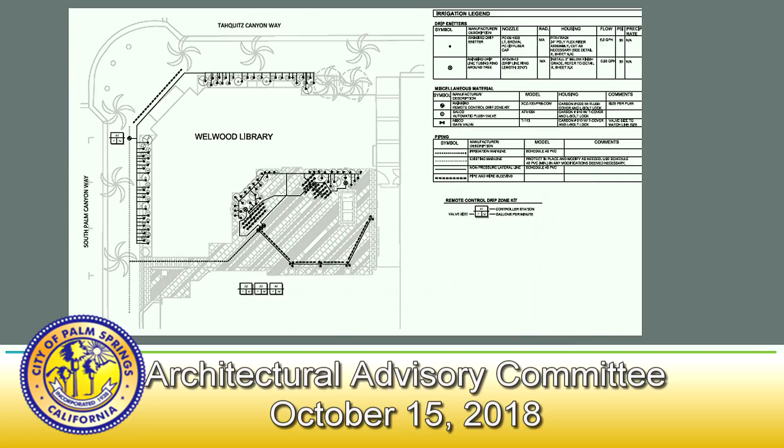The historic assessment that is outlined in the Kalon report attached to your staff report identifies that we do have some information about how the courtyard was arranged when it was first constructed. The courtyard as it exists today has essentially lost all of its historic integrity and features that were there at the time of its original construction.

Not only that, but in terms of its actual context and surroundings, the report and the photos indicated it as being sort of an open and sunny patio. It's now fairly landlocked by taller buildings and is in shade most of the year. There are some historic photos in the Kalon report that you'll also see. So the goals of this review, as noted on page 5, are to seek from the AAC recommendations on what portions of the Kalon report might be appropriate to bring into the design, and what aspects of the current Volz design might be reasonable and appropriate to remain.

The primary issues or differences, if you will, between the library board and the HSPB is one of design aesthetic. There are certain functional issues that the two groups are concerned about, but the primary driver, if you want to say the contrast or difference between the two, is that the library board is seeking a design that is fairly contemporary in nature in its style and patterning, and the HSPB believes that more of a traditional or historic design to the landscape in that courtyard would be more in keeping and be more harmonious with the architecture of the building.

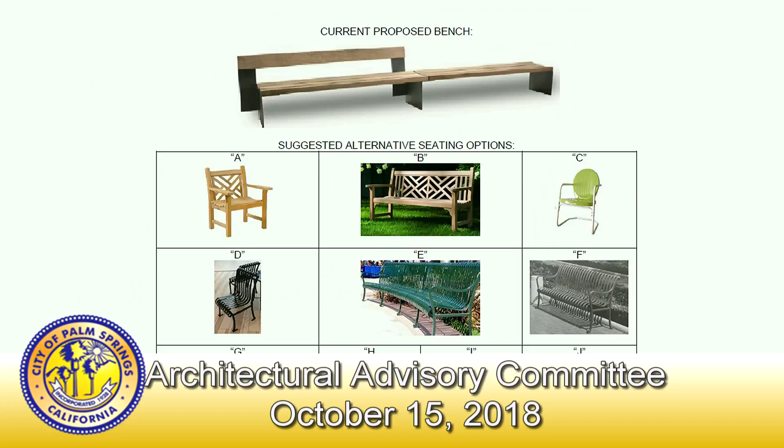That's fine. Another question: are there public restrooms in the library that people using this courtyard will have access to? The public restroom is in the building next door in the new Plaza Los Flores. Flores? Yes, and we have a key to those restrooms because our restrooms are not ADA accessible. Our restroom, there's one single, and so then the downtown restroom program, and then the Plaza Los Flores is actually the designated restroom. Anybody using Plaza Los Flores has access to this.

Does Plaza Los Flores have any requirements for maintenance or upkeep of this area, since it's something that their building is using? I can't answer that for sure. I can tell you that within the development standards and the conditions of the land use permit for Ben & Jerry's, which is the ice cream shop, they're responsible for maintaining the area immediately adjacent to their tenant space. Their land use permit does not include seating and tables in this courtyard.

And I do know that our facilities, they come back there and power wash weekly. And our facilities director mentioned that we should avoid textured pavers or textured anything because the pressure washing might wash it away. And that was a concern for her. And there are a couple of other concerns. But no more questions for me now.

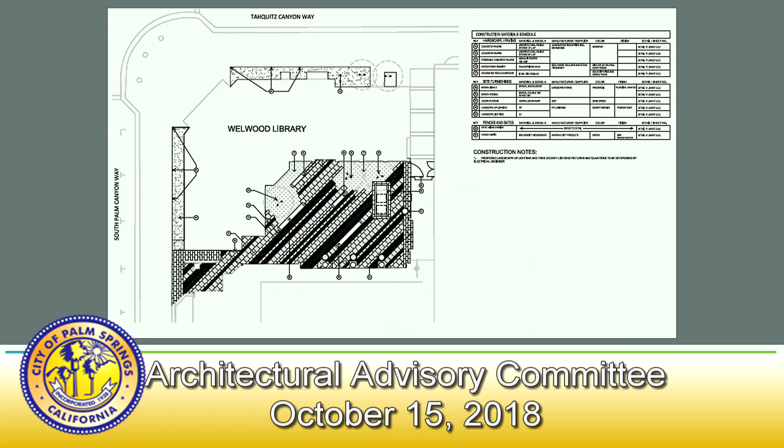So this plan proposes a planting area in front of the diagonal portion. That's going to your left. This is planting, and this is okay. Yes, and there are existing trees in those areas, so there would be plantings around the existing trees and keeping the trees. Okay, thank you.

Member Tom, questions? Thank you. You know, this is a tough one. I know this project's been around for a long time, and different people have looked at it over the years trying to figure out the best use. It seems that the design right now is kind of a historic building set in a contemporary setting with the way the pavers are laid out. And I think if that contemporary paver carried out across the sidewalks and into the street, but right now it's kind of separated from what's happening across the street.

And when I look at the space, I think, well, okay, you have the functional aspects of it that you need for the library and to make it like a reception area. And does it want to become similar to what's across the street, or does it become this kind of tranquil garden courtyard that you might stumble upon, like something you might see in Santa Barbara or Carmel, or more of a historical feeling to it, even though there's nothing historic left, but it could be created where people would come upon it and say, oh, wow, here's a little gem, a little oasis in the middle of this that's more befitting of the building itself.

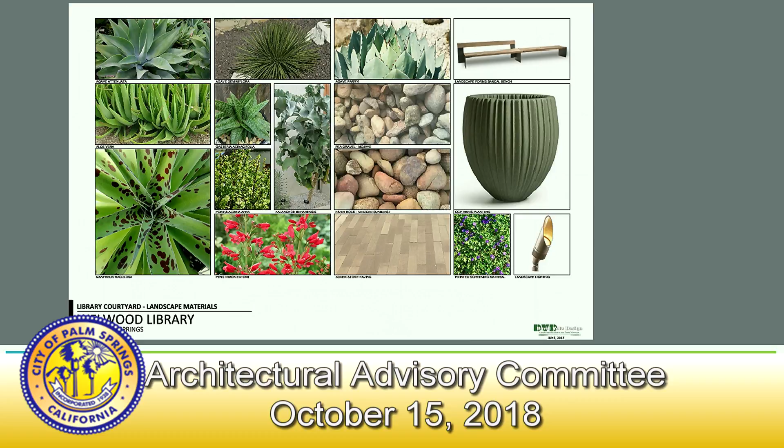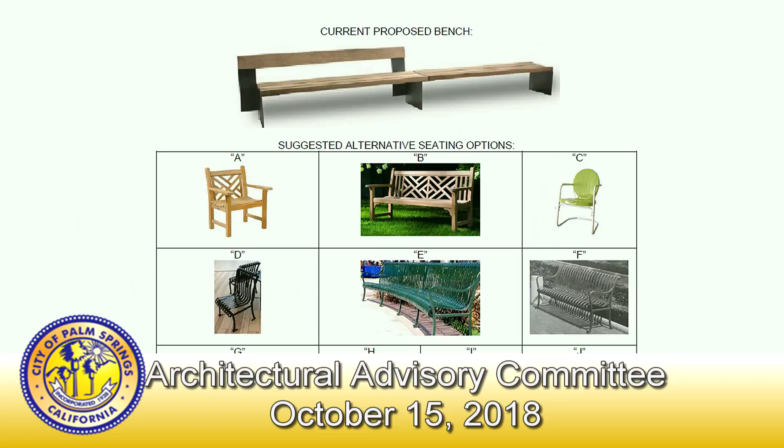It feels like maybe we're going to do another study on this landscape plan, and I wonder if in order to streamline this, because I get a sense that this has been going on forever, and we're just going to make it go on even longer here. I wonder if this wouldn't be a subcommittee that we could work with, work with the landscape architect firm here and maybe help streamline the approval process of this, incorporating some of these recommendations. So that might, yeah, go ahead.

So these are recommendations to HSPB and the planning staff, because of this sort of lack of agreement that they have from the historical recommendations, as well as the city coming up with what they have for improvements and the fact that they want to finish this. So we could have it as a volunteer committee to help re-guide this design, but it's not necessarily a project in which it goes through the normal process of AAC, correct? Right.

I think that with the information that everyone is commenting, I'm hearing consistency in it. And I think that the landscape architect can come up with a simplified palette based on your comments and those of the Kalon report. If somebody would like to participate in that, we certainly would welcome you, but I don't think it's essential. I think we recognize that we have one more step to do here, and I don't think that that's going to be a difficult step.

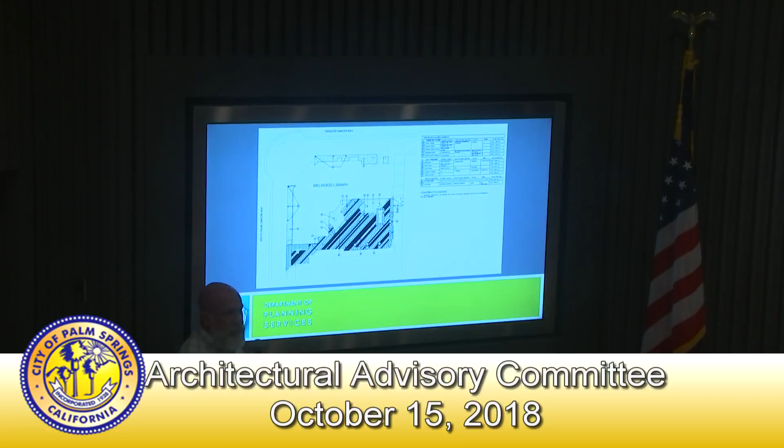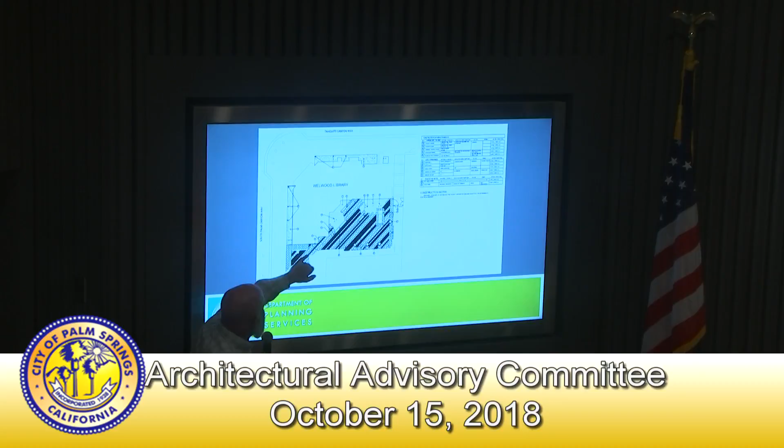Well, it says here remove and replace pavers as necessary to construct curb. That's the curb for this right here. There's a cross slope issue as well as a slope this way, and so this concrete goes in and it slightly straddles the property line to resolve the cross slope. But to the best of my knowledge, and I'll confirm this with Gina, I don't believe we have design rights to this part here. So the angle layout doesn't even make gesture to Indian Canyon. No.

Thank you. Hey, Member Kenny. Okay.

So I'm generally in concurrence with most of the comments made by my colleagues here previously. I'll just put a little bit of emphasis on a couple of perhaps slight adjustments. I really like the idea of restoring the central courtyard tree, some sort of specimen tree. My suggestion would be something that the canopy can be trimmed up high enough so that it doesn't create too much of a visual block if you tried to do some sort of an event in there and people can't see around the tree.

I would also suggest that we don't do any kind of a permanent planter or benching around it, but take benches of whatever style are ultimately chosen. I really like the modern ones that the staff is suggesting, but if they went with something that was too heavy to pick up and steal, but two people of able body could pick them up and then remove. Let me back up one step. Maybe their resting place is in a triangular or square shape or something around the tree facing out so people can sit under the tree.

But then if they want to rearrange them for story time, they can set up a little theater style setting somewhere using the tree as a backdrop or staging area or not. So that was how I visualized it, giving it some flexibility in how it's used. And I think that would also help soften the courtyard with that tree so that it's kind of inviting for people to come up and sit down, maybe coming out of ice cream or just wandering out of the library.

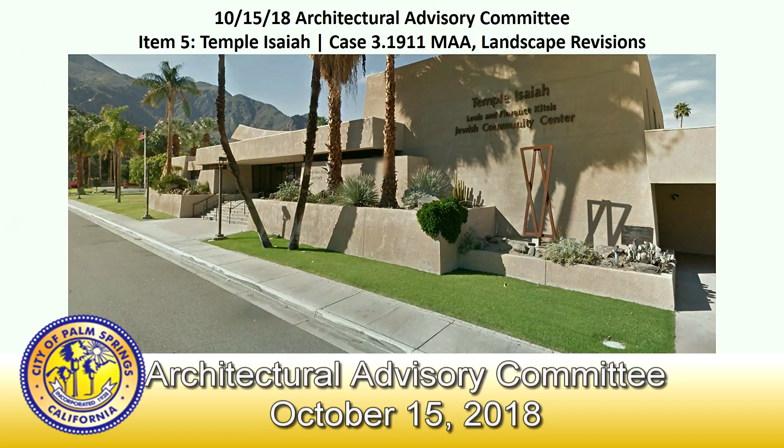The photo that you see here on the screen is actually an old one from 2015 or so. So it does show that much of the site does currently have turf along the south and westerly sides of the building, as well as through some of the parking lot areas. It looks like they have done some converting of the turf within the past few years along the southwest corner of the building. But what they have brought before you today is a new landscape proposal for the whole site, which incorporates many of the existing trees throughout the site.

Particularly the palm trees in the parking areas and some of the existing ficus trees or bushes along the northerly edge of the site. And they are proposing new shade trees within the parking lot. They are proposing 15 Palo Verde trees, 24-inch box size, in various locations in the parking lot landscape areas. They're also proposing some ground cover within the parking lot too. So that consists of the red yuccas, elephant food, and feathery senna plants, as well as some trailing indigo plants.

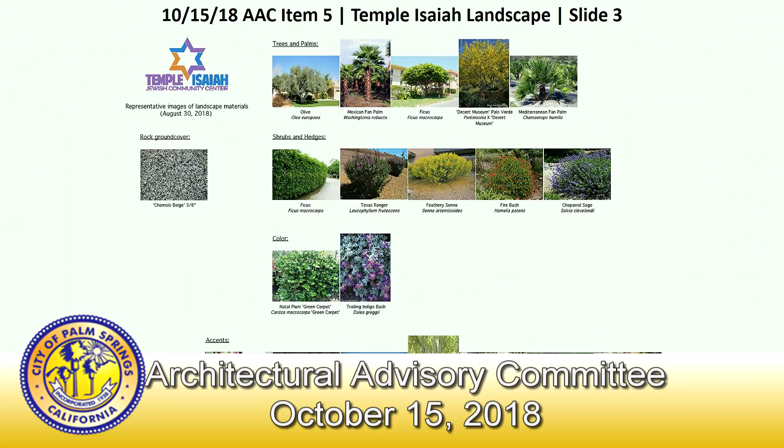There will be some Texas Ranger shrubs along the northerly edge of the site between the existing ficus trees. And the greatest variety of planting is proposed along the westerly and southerly sides of the building. You see on page 3 of your staff report the list of plants that are proposed in primarily 5 and 15-gallon sizes. These plants are shown in the exhibit that was attached to your report. So they do include a variety of colors, heights, and different sizes as they grow. The applicant has also provided the irrigation plan for your consideration too.

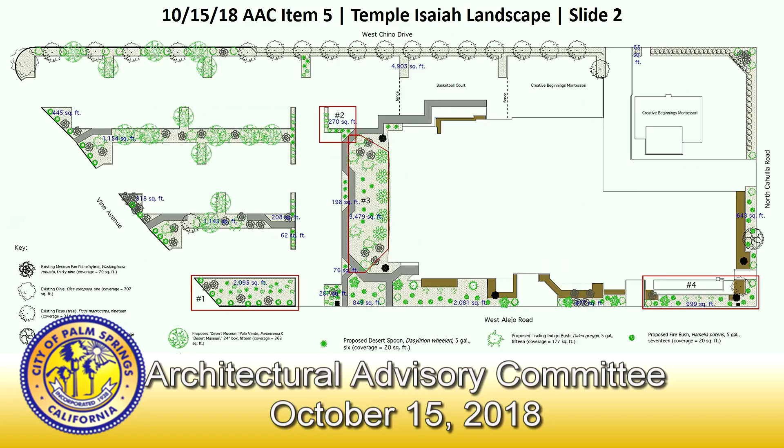So staff reviewed these items against the turf removal technical assistance guidelines and found in general that the proposal does comply with your recommendations as a part of those guidelines. There is compliance with the water efficient landscape ordinance found in chapter 8.60 of the municipal code. They are proposing plantings that are found within the Coachella Valley Water District's Lush and Efficient Handbook. The one tree that is not consistent with that plan is the elephant tree. And so the applicant is proposing 6 of those along the south side of the building.

Staff reviewed the proposal against the architectural review guidelines and generally found the project to be consistent. The one recommendation that we do have is the installation of additional planting along the westerly edge of the site on Vine Avenue. There's a small landscape area between the perimeter wall on the westerly end of the site and the sidewalk that it looks like previously had planting, perhaps some bougainvillea, and did soften the edge of the property along the westerly side of the site. So I'll conclude there, and I'm happy to answer any questions you may have. The applicant is also here to give you additional information on the design.

Thank you, David. Questions for staff? Yes, Member Robert. Hi, David. Quick question. In your recommendation, you talked about the landscape area on the west side of the wall. Where is the property line? Because it doesn't show up on their landscape plan, so I'm just curious where the property line is. On Vine Avenue? On Vine. Yeah, I'm not certain entirely where the property line is relative to the sidewalk. I'd imagine it's behind the sidewalk, but I'm not certain on that. But in all cases, a property owner is responsible for landscape between the property line and the sidewalk, or curb if there is no sidewalk. Okay, thank you.

Yes, Member Tom. I'm confused. I'm looking at the vicinity map, and this property on the vicinity map doesn't touch Rosa Parks Road, so there's something that's not accurate. Well, the vicinity map I have shows it touching Rosa Parks Road. No, the project site itself. Oh, I'm sorry. You're correct. It is. You're correct. It's the box that's up to the north. The square, right? The square. Yeah, it says PD and then the square. Right. Okay, thank you. Yeah, I think it's these two parts. Okay. Yeah. Any other questions for staff?

The applicant here, thank you for waiting. Please come up, your name and address, and we promise to make it quick. Hi, my name is Albert Saldivar. I reside at 500 West Radio Road. That's the place of business as well. I'm sorry, what was your address? 500 West Radio Road. Oh, okay. All right, questions for the applicant?